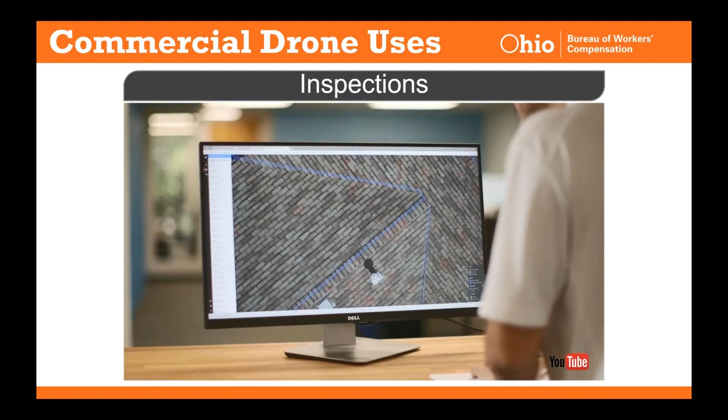Drones are a great use for this, and as you're hopefully seeing on the video, the drone's basically just going to fly over this roof and take a whole bunch of pictures of it. They're going to take all those pictures, put them in the computer, stitch all those pictures back together, and from that they'll be able to determine the area of the roof pitches, and look for anomalies in the roof that might need repaired.

So from a safety perspective, this is obviously a great tool because you can keep your claims adjuster on the ground, and you're gathering a ton of data about that roof in a short amount of time. This is probably a 10-minute or so flight where you could collect all this information, and safely.

Having guys in a bucket hanging underneath a bridge is another hazard. With a drone, your operator stays safely off the road, offset from that, and can fly the drone without closing a lane of traffic. So they're mitigating a lot of different hazards by utilizing drone technology.

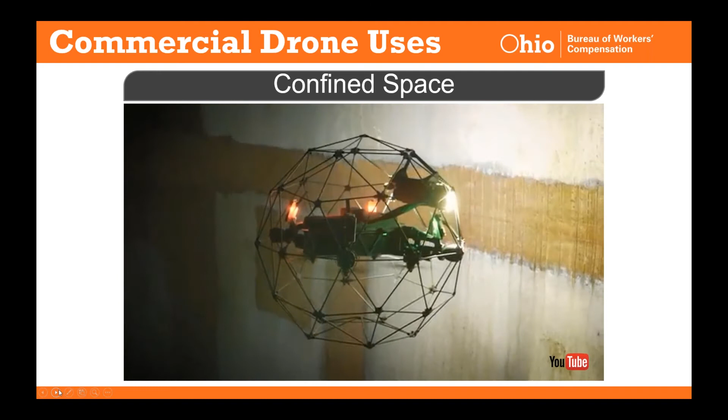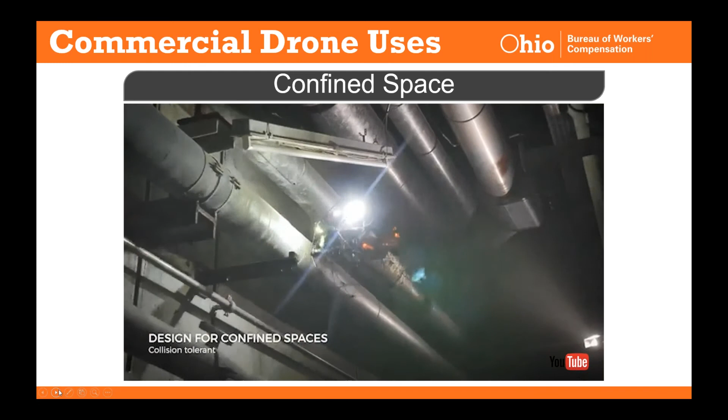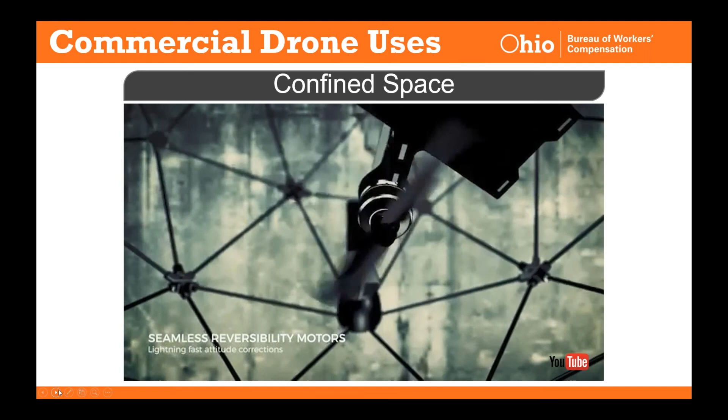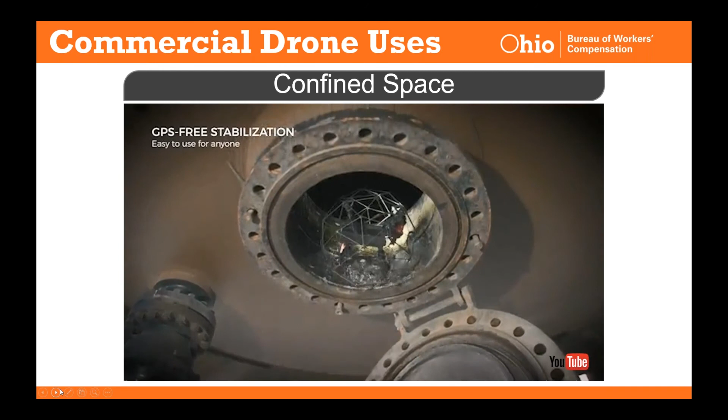Confined space: this is a pretty specialized drone. You can see it has a cage, so you can put it into places you maybe don't want to send a worker—whether they'd get exposed to chemicals or gases, or it's just an area that's difficult to get to safely. This drone has a light, a thermal camera, and features to help it not get hung up on things. Very specialized, but again it's doing that same kind of difficult, maybe unsafe, inspection work while keeping the human outside of that area.

So, another great use.

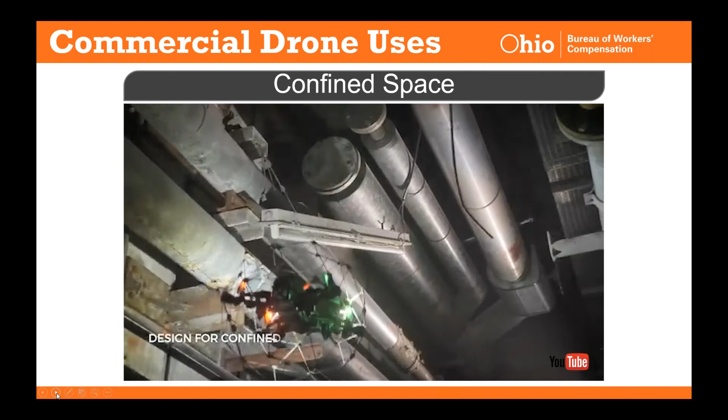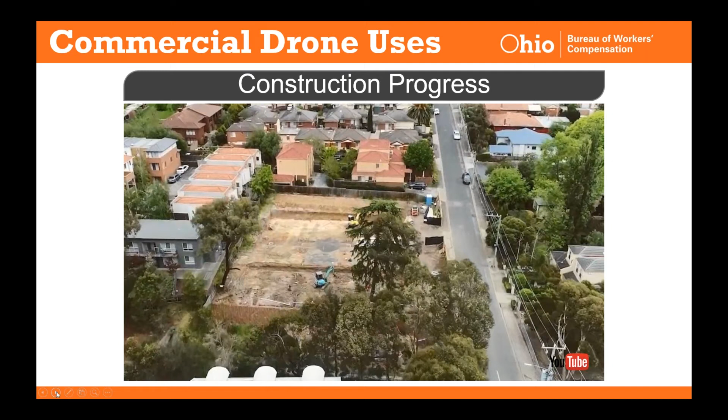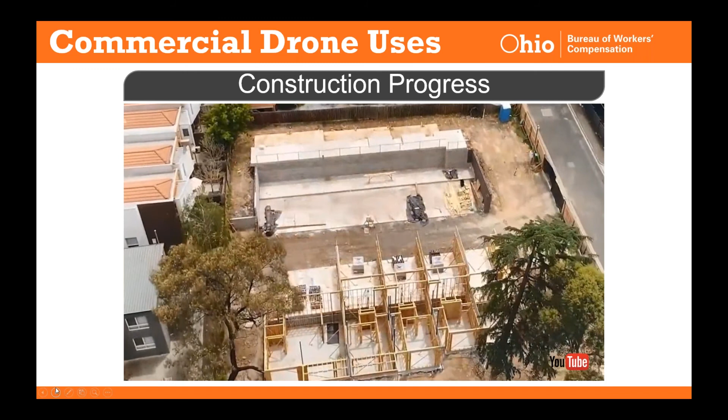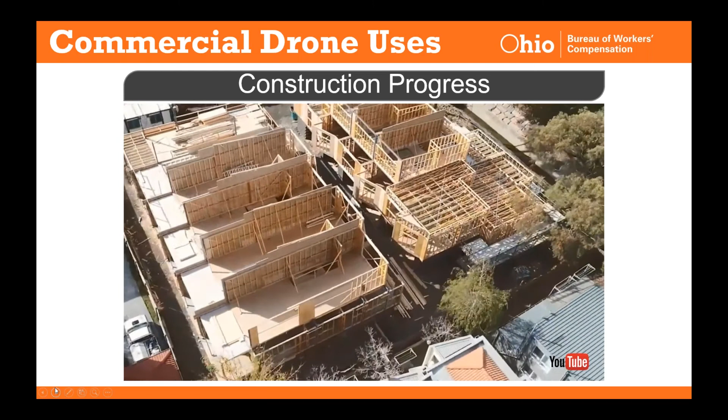For construction—and I'm sure you'll hear more about how construction is using it later—this use is just tracking progress of a construction site. You'll see a drone that has flown the exact same loop throughout the course of this project, and now we'll see how that's changed. This is a great tool for a site supervisor to see the progress of the project, but also what materials are on hand, what equipment's on site, and those kinds of things, if you can get that imagery on a weekly basis. It's a neat video to see how they do that.

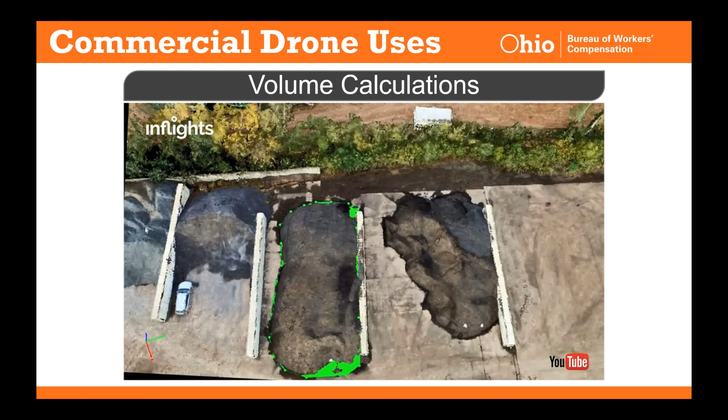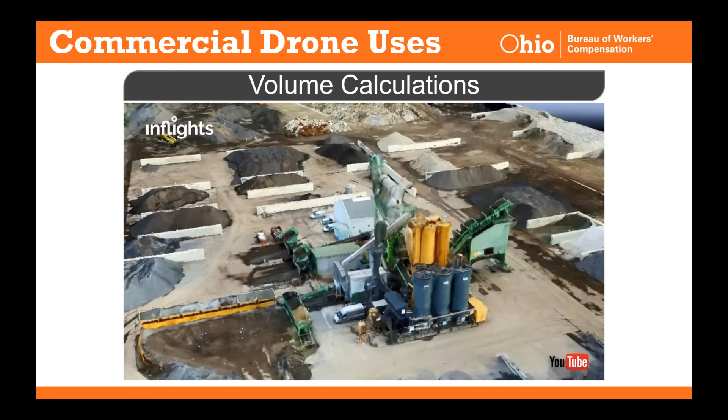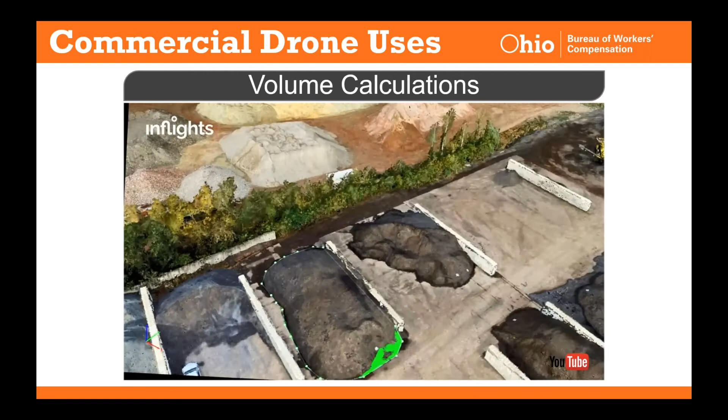They fly the drone over the entire facility and, similar to the roof example from earlier, take a whole bunch of pictures, then use a computer to stitch it all together and create a 3D model of everything out there. Now you'll see them basically clicking right along the toe line of that pile of material, and just by clicking calculate, it gives you the volume—very accurate. So, another great way to use this technology.

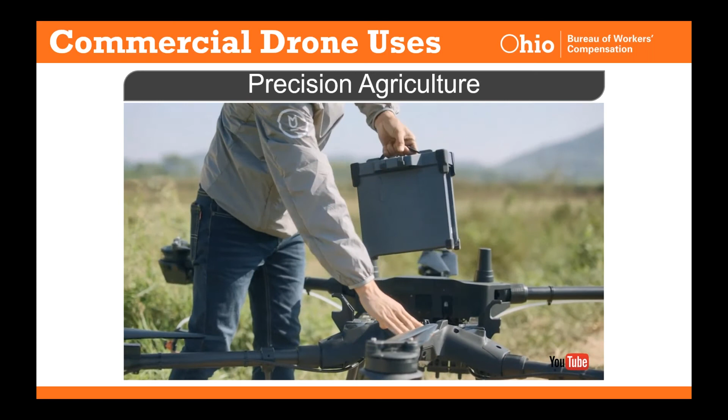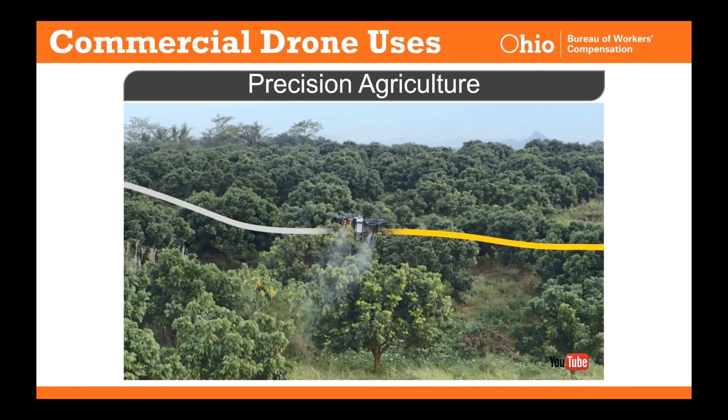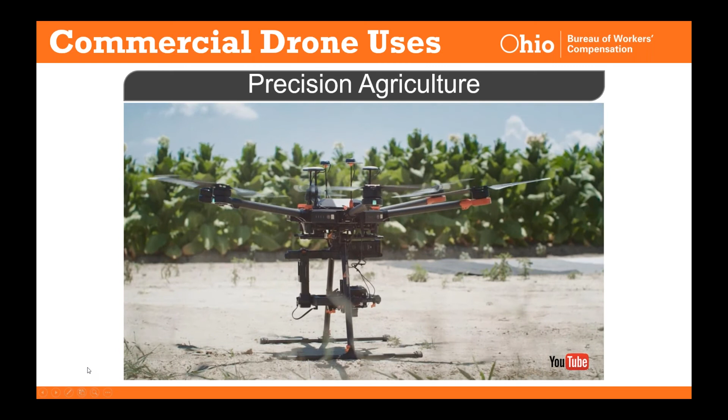Our final commercial use is precision agriculture. These are some pretty beefy drones used for spraying herbicides and pesticides on crops. It's a very unique use—the prop wash pushes the chemicals down in a nice even fashion, so it's a really great way to do that spraying. It's usually used more for smaller crops, but it's getting bigger and bigger.

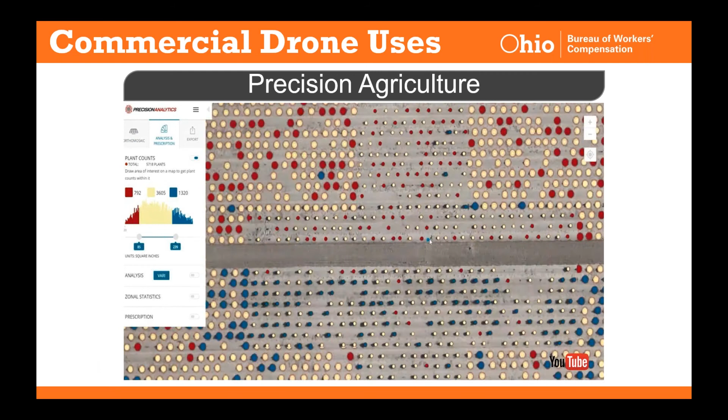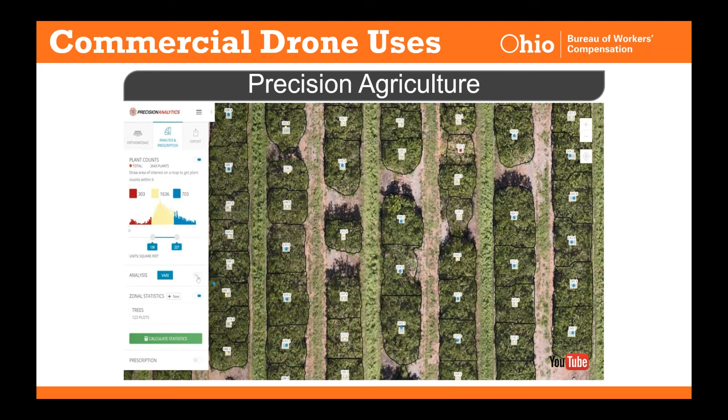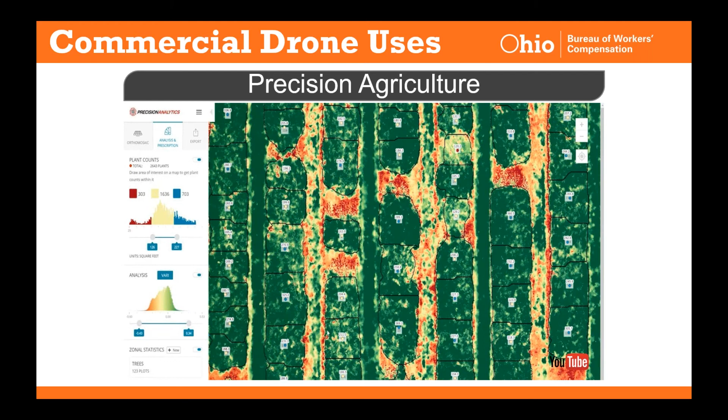The other thing they can do with precision agriculture is stand counts—as they're taking imagery of their fields, they can identify how many plants they actually have there, and how healthy those plants are. So they can see what maybe needs sprayed, what doesn't, or what needs attention, instead of just blanket spraying the whole crop. Those are some different ways they're using drones in agriculture.

Looking at the FAA certification part: Part 107 is the rule that came out back in 2016, and that's what enabled us to use drones commercially in the US. The big hurdle here is you have to pass an aeronautical knowledge test—I'll talk in the next slide about what's on that—and afterward you have to pass a recurrent knowledge test every 24 months, so every 2 years you have to take that test.

It's a slightly condensed test from the original one, but you do have to continue to take it. It's $150 every time you take it. You schedule that through a company that facilitates the testing called PSI, and you can take that exam at FAA test centers—a lot of those are at airports—so you should be able to find a place somewhat local to you.

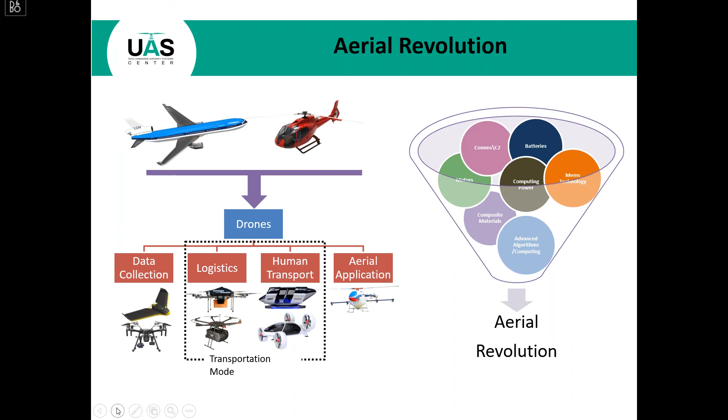So why do we even use drones at the Ohio Department of Transportation? The easy answer is it increases efficiency and increases safety. You see an individual climbing up here.

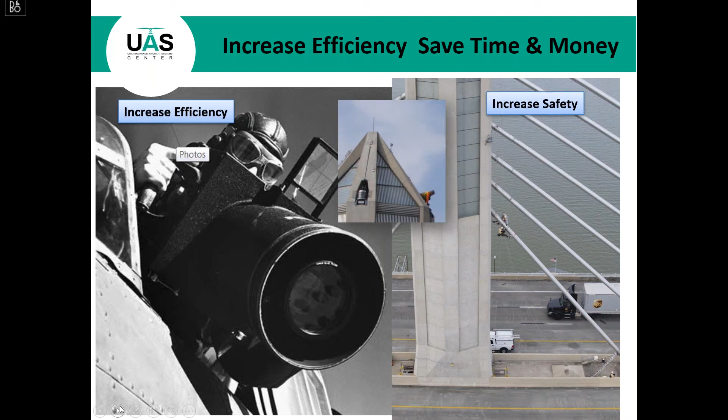This is the Veterans' Glass City Skyway Bridge in Toledo. It's a very difficult bridge to inspect. A couple years ago, a bolt sheared off the top of it and hit a glass panel on the way down. So we just set up a drone real quick to see the severity of the incident. It was quick and easy to pay for, and we didn't have to hire someone to go climb it—a good example of efficiency and safety right there.

We've had a pretty good couple of years at the UAS Center. In 2019, we logged 344 projects and 1,471 flights. Last year, we logged 552 projects and 2,009 individual flights.

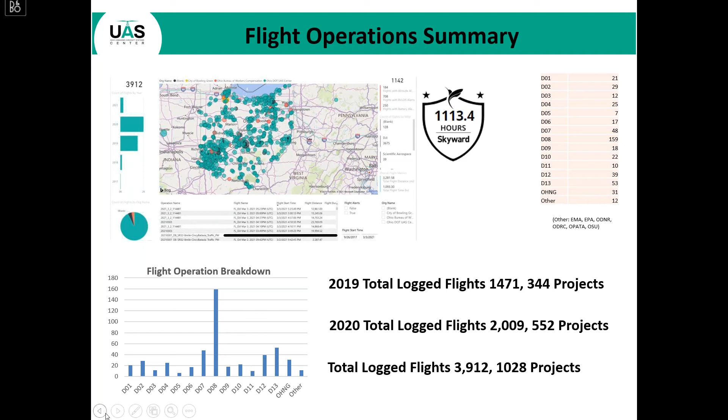We started using a platform called Skyward to track and schedule all of our flights. It does all of our risk mitigation and safety management system applications in one online site. Since we started using that at the end of 2018, we've logged 3,912 flights and 1,028 projects at ODOT. So we've had a pretty good run so far.

Just to give you a timeline, Josh, who we've worked with over the years, illustrated this pretty well—it was pretty difficult to fly at one point, and we were struggling along, flying under public certificates of authorization. It wasn't until 2016, when the FAA came out with the remote pilot certificate, that things really changed, not only for us in the Department of Transportation, but nationally. Folks were allowed to use this for commercial applications.

It was easier for us to train pilots and find pilots—you didn't have to be a private pilot in order to fly these like you did at one point. So it really was a game changer for regulatory purposes back in 2016. We started buying more aircraft, hiring more people, and really took off with using this as a tool to increase our transportation infrastructure and maintain it more efficiently.

So we've got a variety of aircraft you may be familiar with. We've got a couple of fixed wing aircraft that we use, the eBee, and hopefully we'll have more opportunity to use those as restrictions lighten up to fly over moving traffic. We have 4 M210s, our primary aircraft for looking at traffic vehicles. They have thermal capabilities, and we use them for public safety, looking at landslides, flooding events, and national emergency operations.

We have Skydio 2s, which we use for communication and bridge inspections—we now have 8 of those. We have a couple Inspire 2s, one M600 which is a heavy lift aircraft, one Helios, and 8 Phantom 4 RTK Pros.

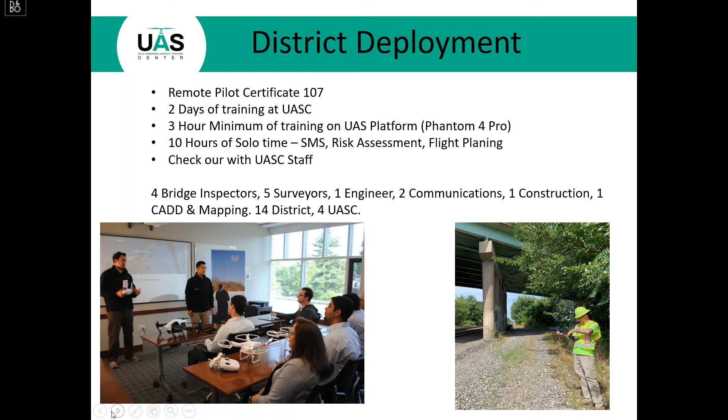To recap, we've got 4 bridge inspectors now, 5 surveyors, 1 engineer, 2 out of communications, 1 out of construction, 1 out of CADD mapping. So we've got 14 folks in the districts, and that number's starting to climb. We've also got 4 UAS Center folks flying on a regular basis. So that's 18 folks at ODOT out there flying on a regular basis.

One of our biggest focuses is traffic monitoring. Here's some press we got a couple years ago: a recent drone survey by the Department of Transportation's Unmanned Aerial Systems Center led to traffic signal changes by the city of Brooklyn, in an effort to mitigate frequent traffic log jams in the area, especially around peak times.

That's basically what we're doing. The next slide shows you that if you get that bird's eye aerial view of what's really going on at the intersection and with traffic signals, you can see multiple points at once. You can look at the traffic buildup and the signals to see where the signal timing is going. This tool is an excellent opportunity for traffic engineers to get a look where they wouldn't be able to before.

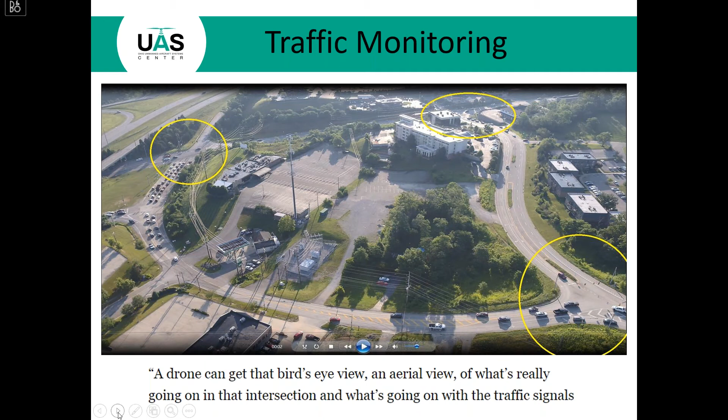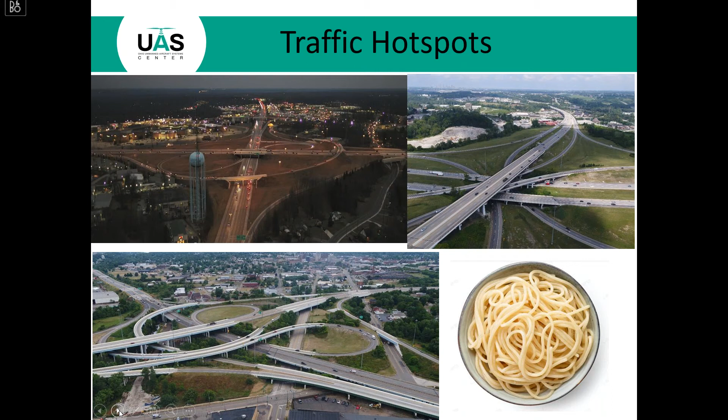We do traffic analysis all over the state, and I always say if it looks like a spaghetti bowl, we're out there taking a look at it. We look at a lot of high traffic areas, and obviously around school times and rush hour it can be really congested. So we look at ways we can make traffic a little smoother through these spaghetti bowl type areas.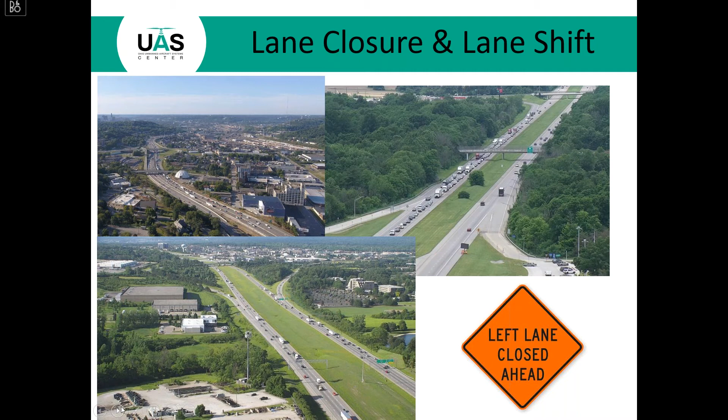Another area is lane shifts and lane closures. The quickest way to cause traffic problems on the roads is to close a lane, and that happens a lot for a variety of reasons. So a traffic engineer will call us up and say, hey, we've got a lane shift going on up here, can you look at where it might come to a bottleneck and see how we might be able to change the traffic pattern.

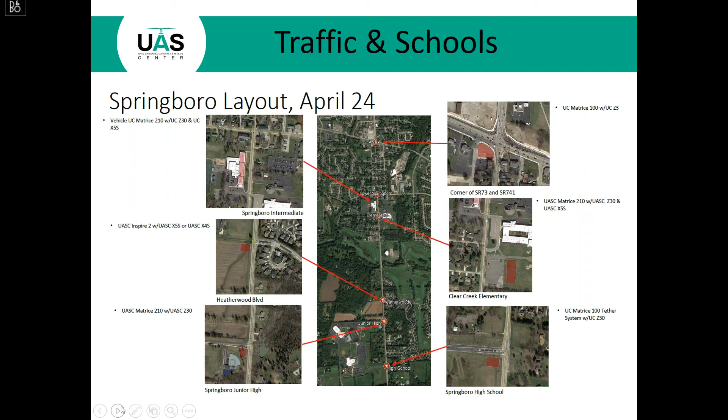Another area we get called to is school zones. This one's in Springboro, Ohio, where there are 5 schools all within a half a mile of each other on a 2-lane road. So with the University of Cincinnati research project, we had 6 drones up at once looking at all these congestion areas. The result was changing the timing on the lights to make traffic flow a little smoother, and we also positioned law enforcement at some critical areas to wave and stop traffic. So we were really able to figure out what was going on by using this technology.

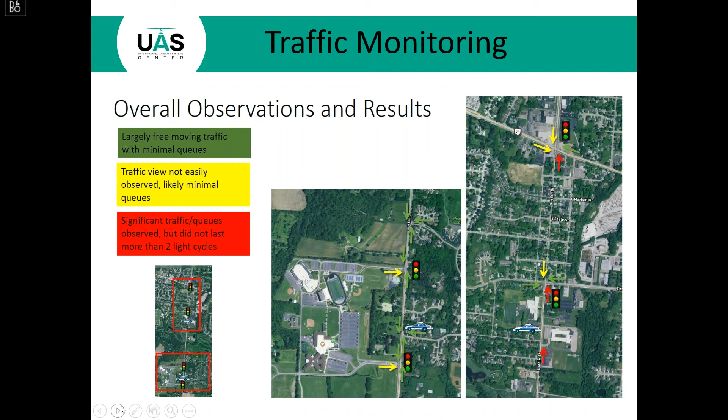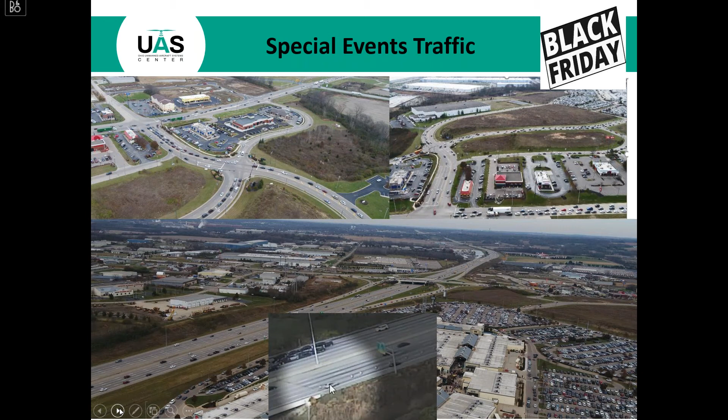Special events, we get a lot of requests around the year, like Black Friday. This is down at the outlet malls in Monroe, Ohio. What really happens here we get concerned about is when traffic starts to build up on the freeways. Everyone's trying to get to this gigantic outlet mall, and it starts backing up traffic on the highway. That's a big issue for us, so we get called out to areas like that to look at the traffic.

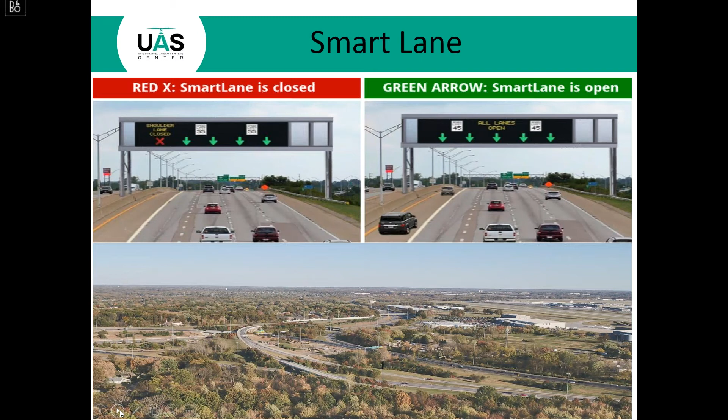Smart lanes, looking at ways we can increase traffic flow. We took a look at this using a drone, comparing before and after in this particular case.

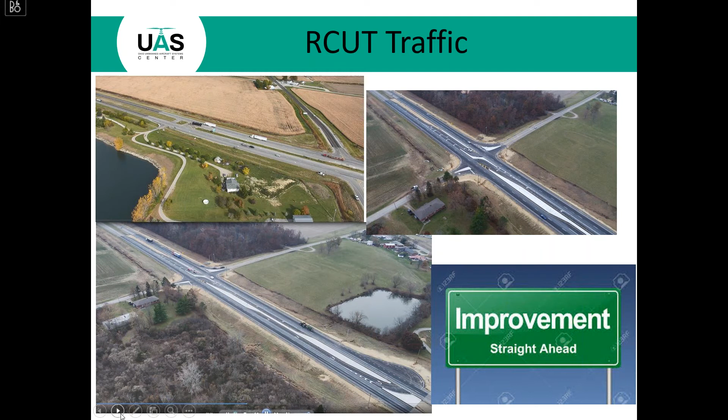New traffic R-cuts are new to Ohio. They've been around in places like Indiana for a while, so we're putting these in across the state. It's a way that semis can cut across two-lane traffic without taking an initial left over the traffic. They can take a right, then another quick left instead of going over all the lanes of traffic. We're looking at a lot of these going in across the state all over the place.

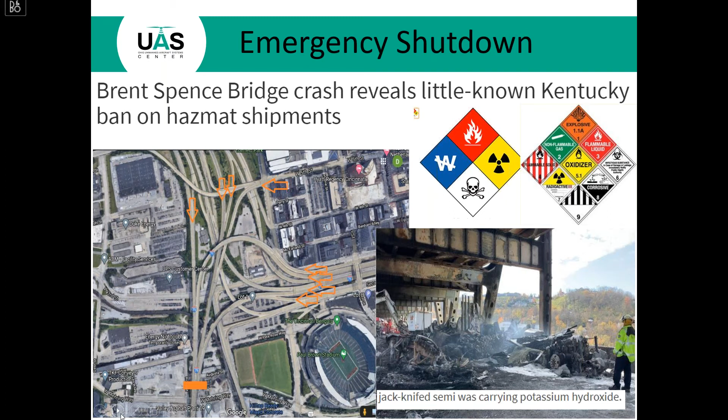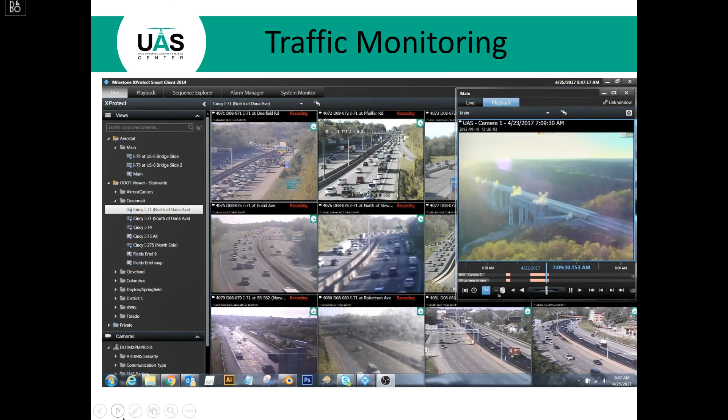Another area we've been using drone technology with a lot is this smart milestone box. This milestone box feeds into our traffic management system at ODOT. If you've ever seen the pole cameras, you've seen how we can link into this. We can go anywhere in the state and put a drone up, and it can feed right into our traffic management center, and that feeds in the Ohio National Guard, Ohio EMA, and the governor's office. We've tested all that, so if there's any major incidents, we can dispatch a team out there, look at an incident, and pipe it to these decision makers in Columbus.

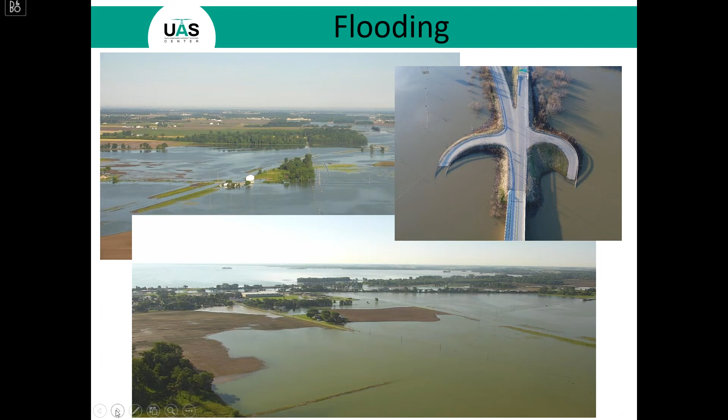Flooding is another big one. Grand Lake St. Mary's tends to flood almost every year, so we take a look at that. There's only two ways in and out of Celina, and they're looking to possibly build a third way for when the flooding happens. We also look at a lot of flooding down in southeast Ohio, so we get called out there a lot.

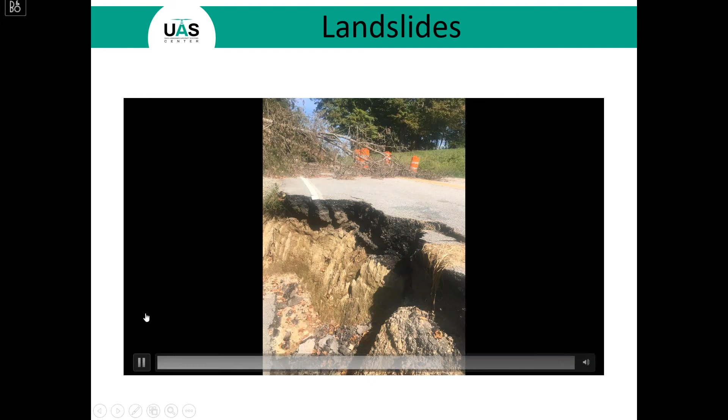Another result of a lot of rain is landslides. I actually got a call this morning about going out and looking at some landslides in District 11 by the Ohio River - we actually caught one slipping here. This was District 11 as well. We get a lot of calls to come look at landslides. Here's another one in District 8, down in Warren County. So we're always getting calls for this type of project.

So we're able to let the engineer know, hey, you've got a problem over here as well.

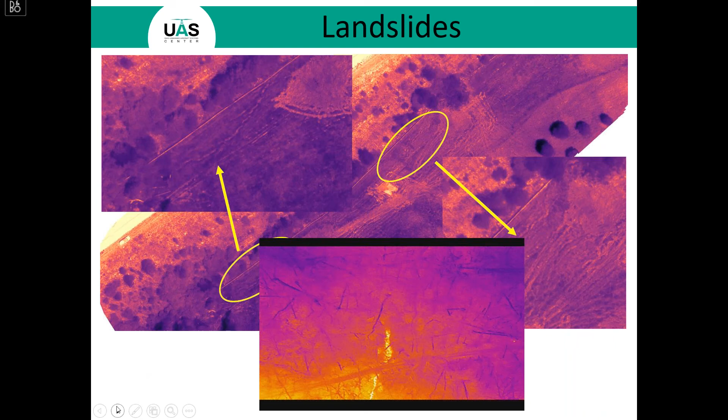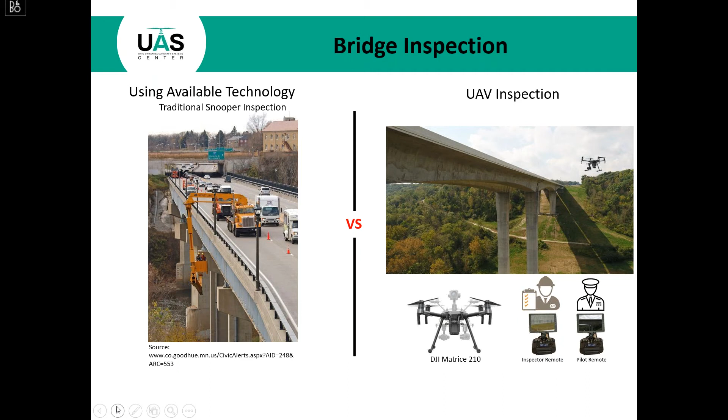Another one we use a lot, probably our biggest return on investment, is bridge inspection. We still use snoopers, but those are always scheduled about a year out in advance and are always moving. So if we need to look at a non-critical fracture area, we use a drone. It's a fast, cheap way to do it. We look at everything from scour assessment, footing detail, cracking, and delamination.

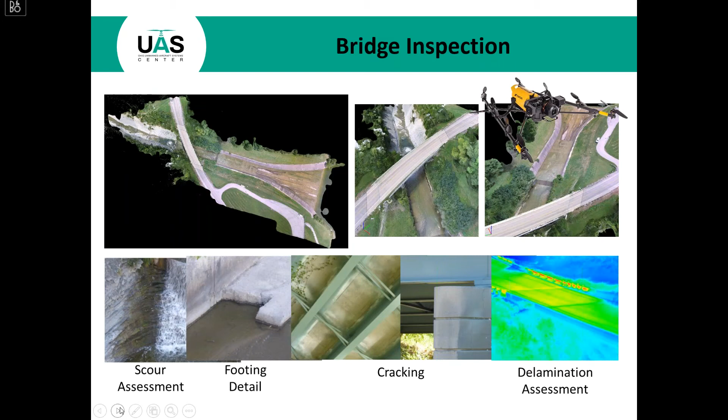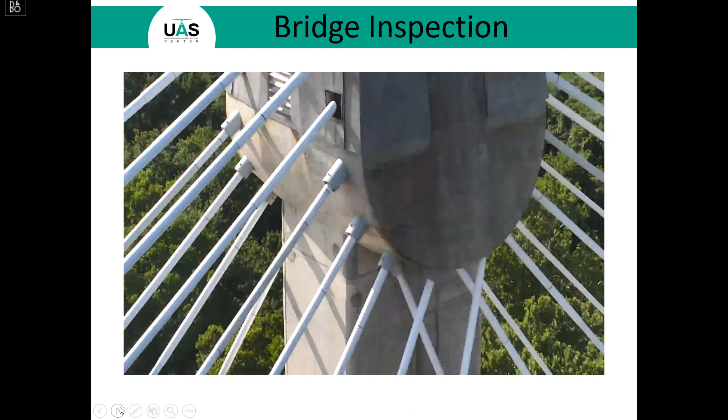Here's another use for it. There's a cap on top of this big bridge pier that's hard to see, so they can go out there and take a look. Here's a filled-in crack where you can really zoom in and take a look. You can't see this any other way, except by climbing or using a drone. It's very difficult for bridge inspectors to look at previously repaired places over time, so a drone can go up there and take a quick look at it.

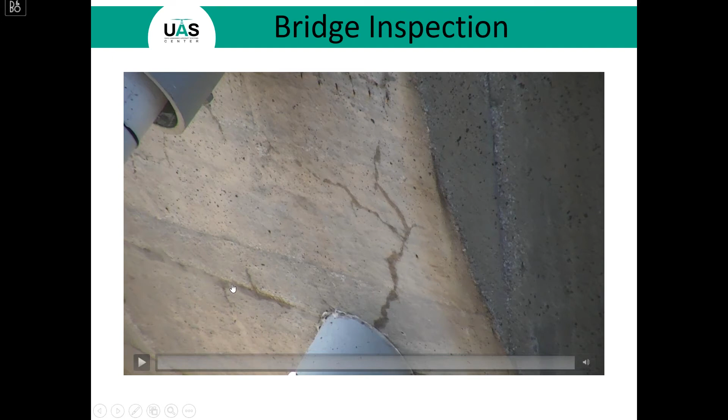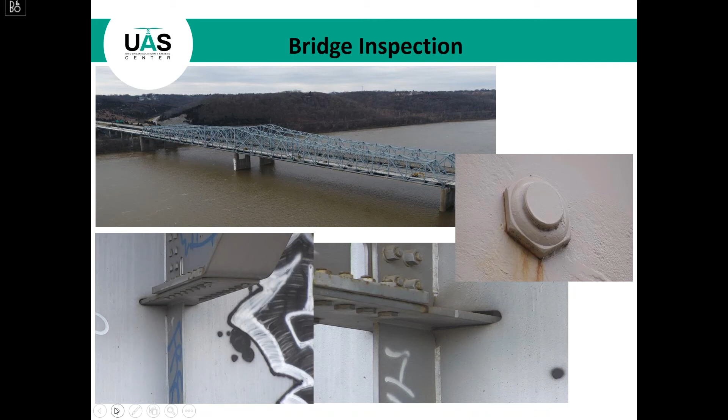Non-redundant bridges, such as the one down in Cincinnati, we look at pretty frequently because they're not supported by four columns like some others are. This is an older bridge, so we look at it frequently, checking all the bolts and areas that might be fatigued over time. It's a great example.

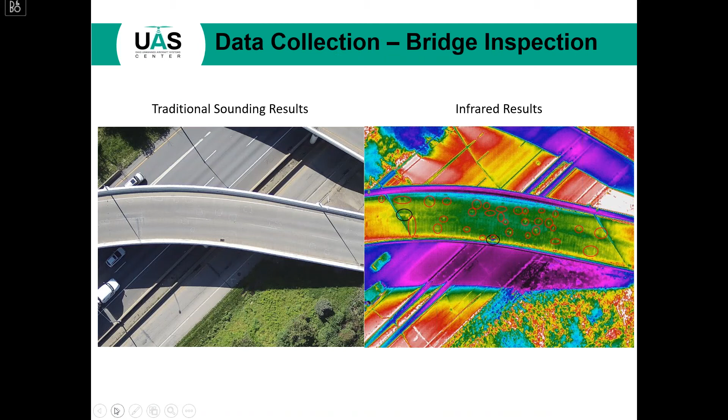Delamination, I mentioned that before. So we're using this technology to look at surfaces of a bridge deck that may have cracks in it. Here's another example underneath—you can really see the cracking by using thermal cameras in the different areas of the bridge.

Here's another example that's gaining traction: salt barns. When we have heavy winters—it wasn't too bad this year, we had a couple weeks—we're always trying to fill our salt barns after the winter. So we go into the salt barn calculations. We're able to fly a drone, see how much salt's in there using the square footage of the building, and calculate how much salt is left in that barn.

Here's another use I mentioned before—shared service through other state agencies. This is using a magnetometer with our M600. In the 20th century, all the farmers were trying to strike it rich looking for oil in their fields, so there are a lot of uncapped wellheads across the state, and they're environmental hazards. They leak into the streams, and we had a couple, I think in 2018, that actually exploded. So ODNR is trying to identify some of these hazardous ones across the state using drone technology, and it's working better than anyone ever thought it would. We're happy to share that.

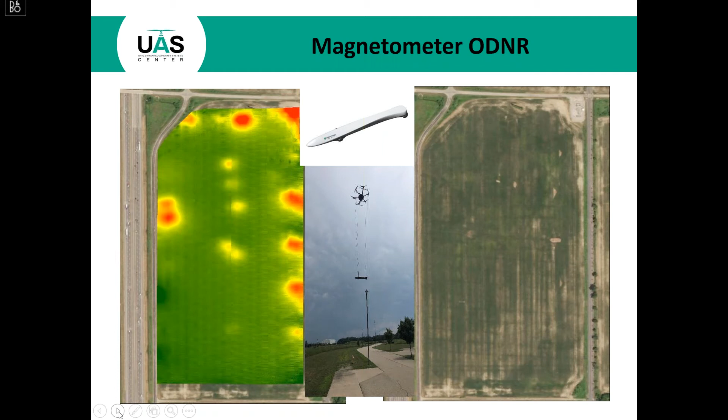A lot of construction monitoring is what we get called out for as well at ODOT. A lot of times the engineer or project manager wants to know how progress is going, how the vendors are doing—are they as far along as they say they are? So we'll get called out various times a year to look at the same project.

New bridge construction—we're always building a bridge, resurfacing a bridge, or doing something. So we're always getting called out to look at the construction of a bridge, not only inspecting it but also the construction process itself.

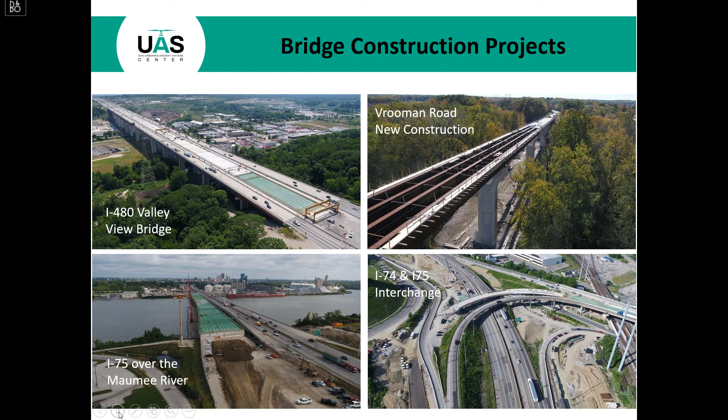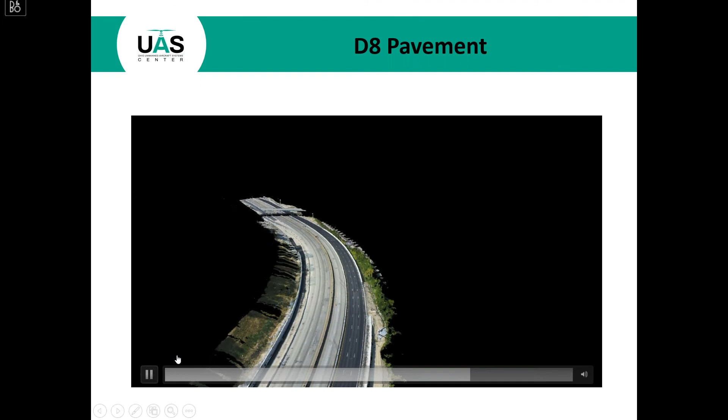Resurfacing—our survey department is starting to use this to look at pavement and repaving. Here's a point cloud of a bunch of images stitched together, I think over 5 miles long—a really long one. This is down in District 8. They're getting ready to resurface a road at the beginning, and you can see they're already midway through the project here. So we have the ability to stitch a bunch of images together and look at big paving projects.

Another one we shared service on—we worked with the Ohio Department of Public Safety on accident reconstruction. The one on the upper right was a test run we did. The upper left is an actual Ohio Department of Public Safety case using drones for accident documentation and reconstruction.

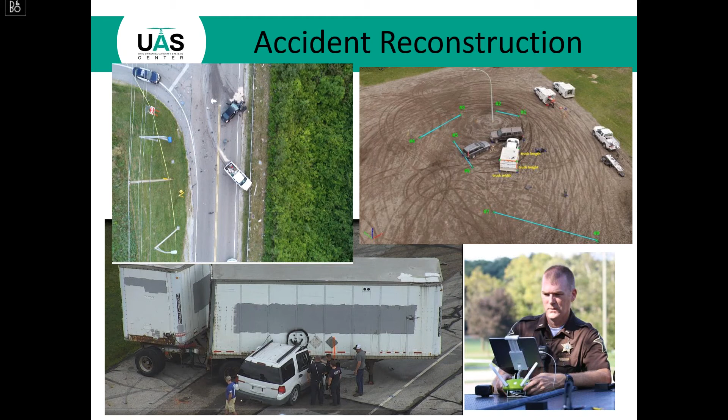Orthomosaic type of work—this was the city of Dayton. They asked us to come look at an area where youngsters were drag racing. They wanted to put in some speed bumps to mitigate the drag racing, so they wanted to look at the whole area where it was happening. We gave them this information to do whatever they wanted with it, but they requested it.

The Department of Agriculture is in charge of roller coaster inspections. We did this early on, looking at Zoombezi Bay in Columbus and Cedar Point up in Sandusky. It's just a large structure with connection joints, bolts, nuts, and previous repairs, so it's a lot easier to send a UAS to take a look at it than to have someone climb it or just stare at it from the ground.

Attorney General's office occasionally acquires new property. This one's up in Toledo, where they're trying to strike a deal with the local landowner to put in a new on and off ramp. So they'll call us to take a look at a particular property so they can document it, using a bunch of photos stitched together.

This next one is for Ohio EPA, another rubble pile. This was the ARCO site in Cleveland, where a bunch of defunct houses were being recycled and basically dumped in the neighborhood. That business went out of business and left this big rubble pile for the state of Ohio to clean up, so we did some calculating on volume to see how much it would cost the state to remove it.

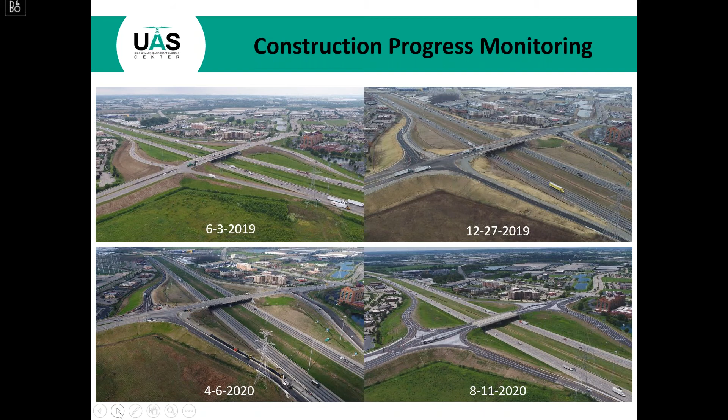I think I already had this one, more of the construction process. These are duplicates, so I have to apologize for that.

Just real quickly, a few policies and procedures: the Unmanned Aircraft Operations and Data Usage Guidance, operating within ODOT right-of-way, our privacy policy, and a bit about our safety management systems, flight planning, and risk assessment.

At the Ohio Department of Transportation, the UAS Center is the sole department responsible for conducting unmanned aircraft systems operations, and we assist other districts. We've had some instances of folks using private drones without a license, so we kind of manage that process for ODOT to make sure everyone's following federal and any applicable state guidelines.

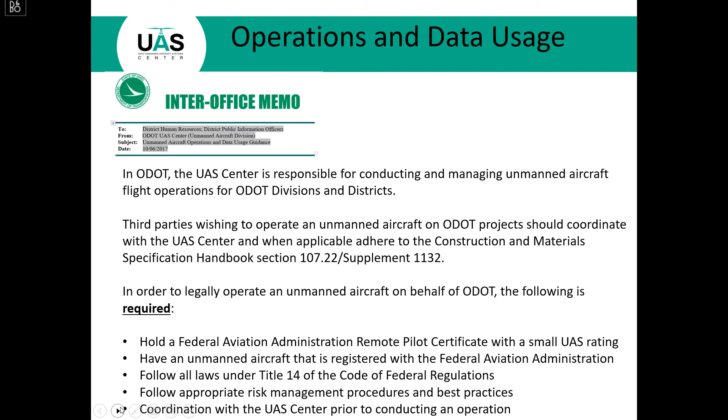We do have a privacy policy put together by our chief legal office in 2017. Basically, we're following Ohio's public record laws, and we're the collectors of the data. So when we send it off to an agency, depending on who you are inside ODOT, they destroy it within two weeks, per the guidelines. Or if it's bridge inspectors, that stuff never goes away because we're always documenting cracks and how previous repairs are going. So some of it's destroyed, some of it's not.

Just to touch on our flight management and risk assessment—it's pretty robust, following closely to manned aviation and how we dispatch our crews. There's a scheduling process that looks at airspace and power lines. They go through a risk assessment, there's an approval process, and if everything looks good they get signed off and conduct their flights. If anyone's looking for standard operating procedures or flight manuals, I can send that your way—we have a pretty extensive one.

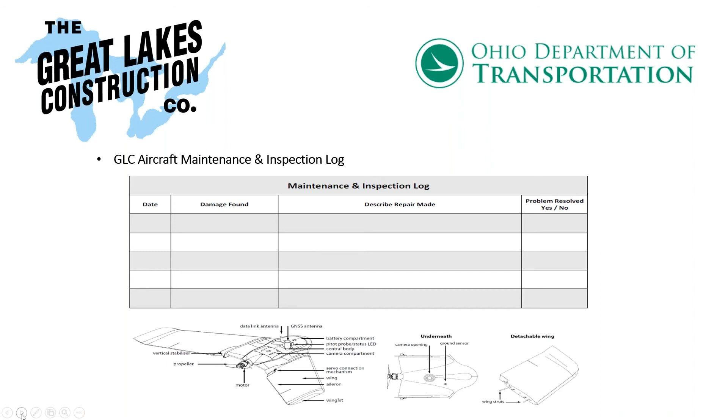Inspection logs—so inspection is critical, making sure that the aircraft is in fact airworthy and is not going to just drop out of the sky. In this particular case, we have an eBee fixed wing that we had used, and each time you would assemble it, you would check and inspect the different servos and parts. If you noticed anything pre-flight or post-flight, you could circle it right on there and make notes about it, so you could follow up on either providing that back to the manufacturer for official repair, or if it's something minor, repair it in-house.

When we originally started our program, we purchased two different drones. We purchased a senseFly eBee, which is the fixed wing, because of its ability to stay airborne much longer, so you could do much longer missions between battery charges. The second one we purchased was the albris, this quad rotor, which we purchased because of several capabilities it brought to the table—able to vertical takeoff and land, and the optics on it would rotate 180 degrees. So this brought a whole other capability that we could then use.

Some of the positives and negatives of the original equipment: one, they were very expensive to get into at this point in time. Back in 2017, you did not have a lot of different manufacturers. DJI hadn't really come in hard at that point, so it was pretty cost prohibitive to get into this.

With the fixed wing, one of the biggest negatives we found was just how large an unobstructed landing zone you needed to land it safely. We had multiple problems trying to get this aircraft to land safely, and although there are things you can do to land in tighter corridors, we found it very difficult unless you had very large open sites.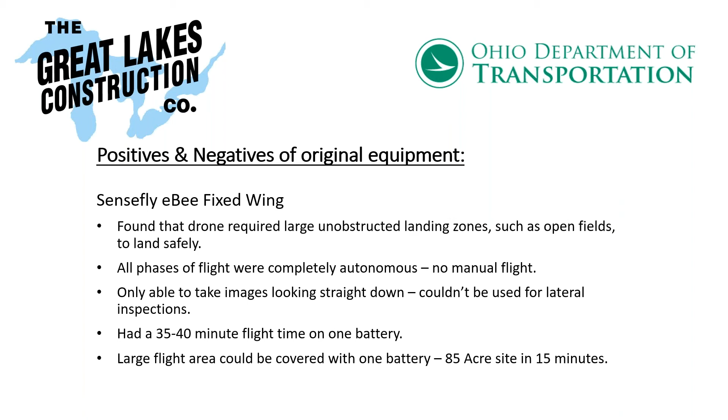The quad rotor, what's nice about that, obviously, is vertical takeoff and landing. It's highly maneuverable, very easy to hand fly, as well as to run in its computer-controlled missions.

This particular one has an incredible camera on it. I believe it was a 38 megapixel camera, which right now in the industry, 20 megapixels seems to be the standard for most mapping drones. So it was a very significant leap in terms of camera quality.

We have since moved over to the DJI Phantom 4 Pro V2, which seems to be the gold standard right now for most people doing mapping missions.

We've also employed the Parrot Anafi, which is nice because you're able to rotate the optics on it, and we use this more for progress photography as opposed to mapping missions. It's easy to set up — it comes in about a lunchbox size kit that contains everything, and then you can just use your iPhone or Android phone as your screen.

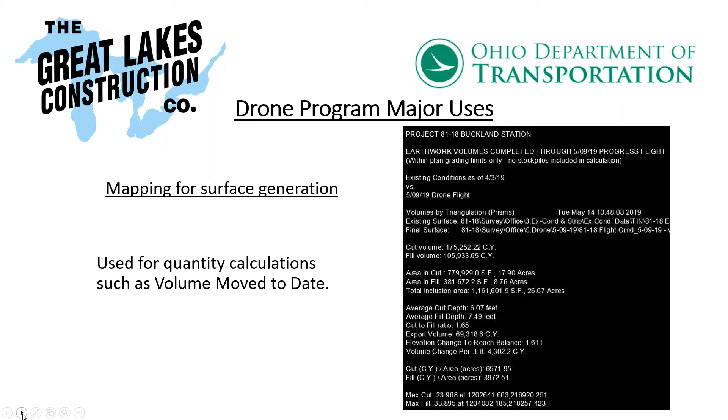Another nice thing with surface generation is not just the volume calculations, but creating a geo-referenced photo mosaic that you can bring into AutoCAD directly under any line work showing the areas of calculation or cut fill stake values, things of that nature. It gives a really good depiction of the site at that point in time, overlain with any volumetric calculation information you wish to project onto it.

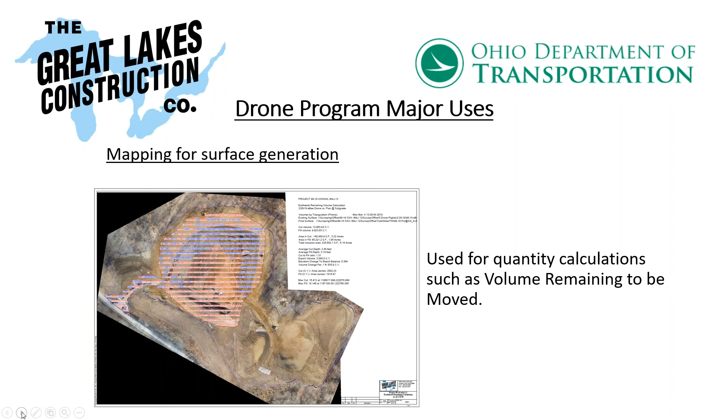We use it for a lot of our private sites where we're documenting the existing conditions of the site prior to, or as we take control of the site, before the beginning of construction. It just gives you some imaging you're able to use to show exactly how it was the day you took control of the site.

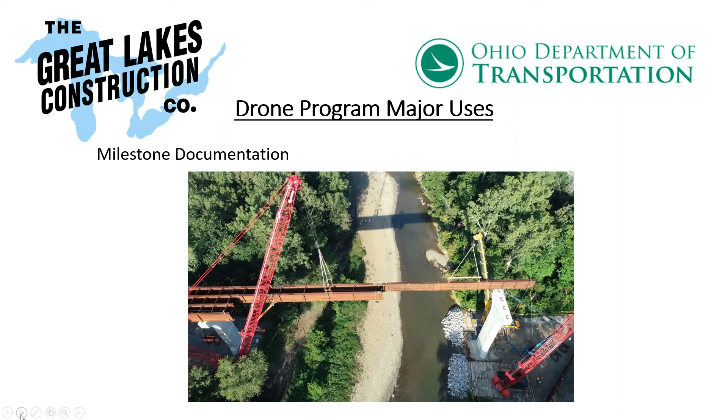We've used it for milestone documentation, as in this picture where we were setting beams on the Vrooman Road project over the Chagrin River. You're just able to see how it looked at that point in time. It's pretty interesting imaging that you can do with them.

Again, this is the same scenario where you're documenting the status of the bridge as it progresses on specific days, so it really enables you to keep a clear catalog of time on a project. This was a Norfolk Southern project where we were building a new bridge adjacent to an existing structure, and again we used it for documentation of progress.

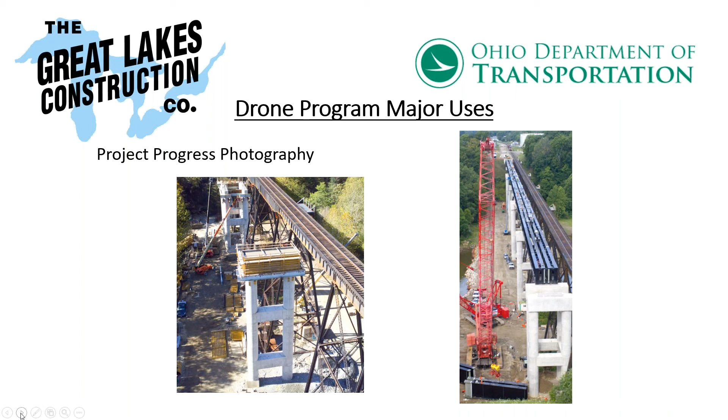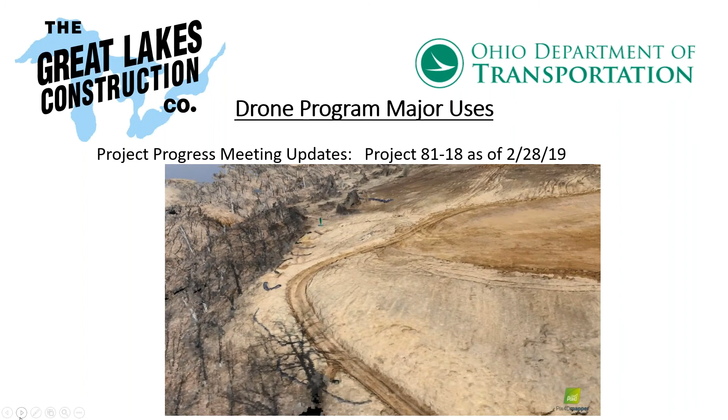What's nice about this is you can use it to show owners who aren't on site all the time, or others within your organization, the progress of the site, so they can get a better handle on the conditions being dealt with.

Environmental factors—you can see, like in this case, all our SWPPP is up, so you can point out that all our SWPPP has been completed as of this date, and here's a visual representation of it. You can see what's been cleared, any area that has been mowed or prepped for the start of earthwork operations.

This is that same project four months later, I believe. So now you can see the same thing, and you can see some of the progress that's been made.

With this, the nice thing about it being a point cloud is you can save your flight exactly as you dictate it. So you can have it follow an access road, which we did in this case, just to give it some visual appeal. But what's nice is now you can see some of your slope protection is in, you've started stoning your access road, and you've started seeding and applying your erosion control blankets, things of that nature.

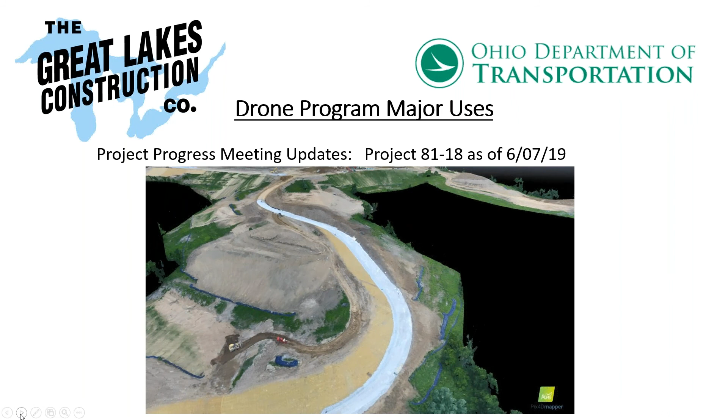You can see where stockpiles have been developed and constructed, and now you can also see the shape of the pad. You can see the progress as it's materialized over time, as well as start seeing growth for stabilized slopes.

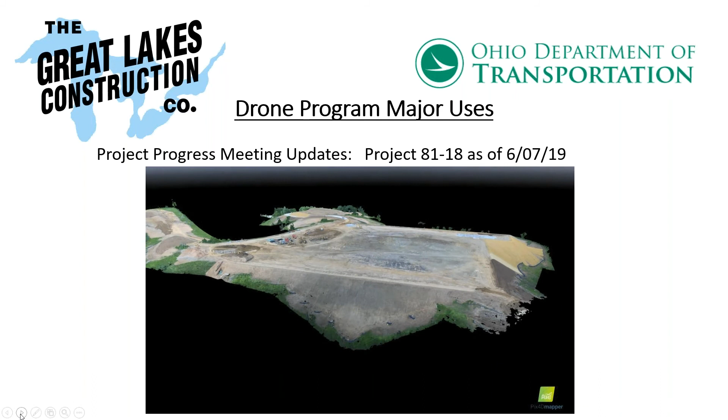That's one thing that is very big as it relates to completion of contract—you have to have a percentage of growth established before the owner takes over maintenance of those slopes. So by doing flights like this and generating the photo mosaics, you can really see how that develops.

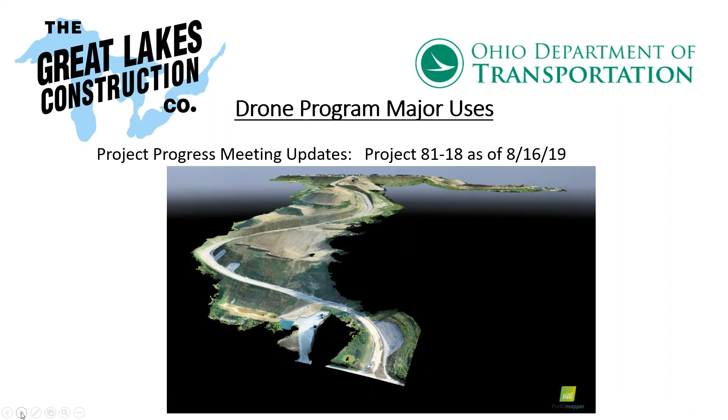When we walk off a project, the last thing we do, if possible, is another flight so we can say, hey, we pulled off the project on this day, this is how it sat. It makes it very easy for us to go back and say yes, this issue was ours, or this developed after we left—it's not our responsibility to repair it, or it at least gives you a hand to discuss.

As you can see here, the access road's done, vegetation is coming through very nicely, the pad's been stoned, and there's another contractor already on site starting the foundations for this work. So it's nice that you're able to develop these.

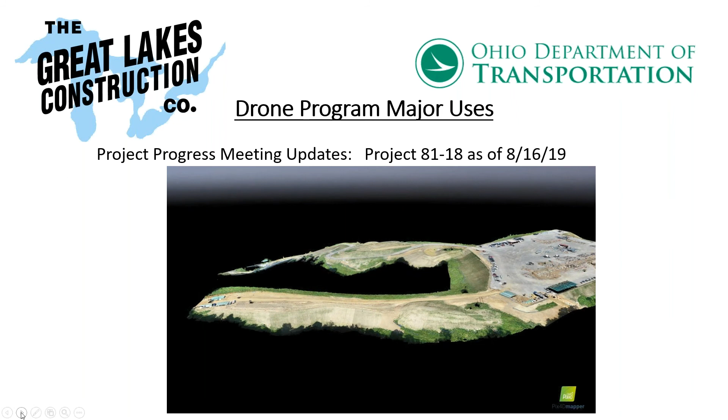I think these little one-minute videos are able to really give a lot of information about the site on that day, how it sat. For people in your organization who are unable to get down to the site on a regular basis, it gives them a much better visual than just a couple static pictures.

One of the other uses we found, at least in our scenario, is seeding and mulching. Seeding and mulching is typically paid as a square yard item, and it's forever a battle we have to fight with subcontractors. They want to go out and take a quick measurement, or if they see an acreage on the site of 85 acres, they just say, okay, it's 85 acres we're seeding.

What they fail to realize is you're deducting out for stone access roads, pads, rock channel protection, all those different items. So to really control our costs and make sure we weren't overpaying, or paying for things that were sprayed twice not at our direction, we would overfly the site, create these photo mosaics, and then within those mosaics create different areas.

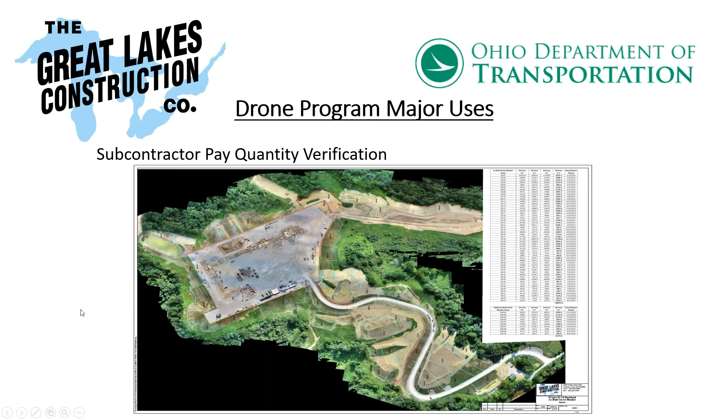Marketing is another nice item. We've been very fortunate to be part of several projects where we've won different awards, and the nice thing about being able to take imaging is that you can submit that as part of your package to these different organizations that provide the awards. So we found that to be a nice thing. A high quality picture really enables your marketing department to show some of your capabilities and what you're able to do as an organization.

So that was pretty much the gist of mine. I didn't want to get down in the weeds too much about the different FAA requirements, and I think our previous presenters have done a very good job about that. If you have any questions, feel free to contact me. Here's my information, and I hope I was able to shed some light on it.